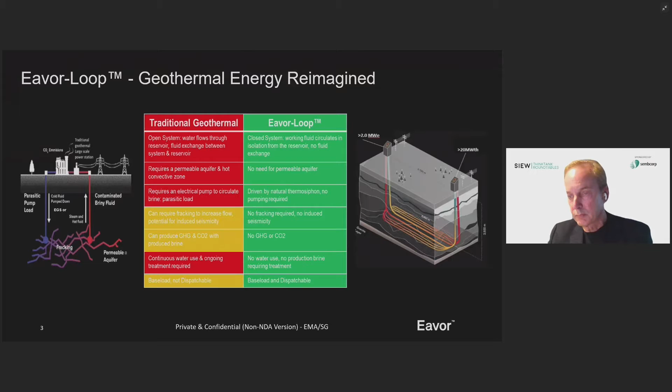And the subject of a much, much longer presentation than the 5 minutes I have today. Next slide, please, page 4.

Thank you. The end result of all this development is the creation of what we feel is a previously unknown energy category that is simultaneously truly scalable, green, and baseload. No other energy source does this. And on top of this, unlike any other green solution, which is intermittent, it can act as baseload. Even better than that, unlike traditional geothermal, it's even dispatchable and can load follow, which can certainly help with grid stability, one of the things you were just mentioning, Sharif.

In fact, with no emissions, no water treatment, no seismicity risk, and a small surface footprint, it's the most benign form of energy imaginable. Being benign and scalable also makes it distributable, another virtuous attribute. Similarly, being distributable, black start capable, and mostly buried underground, it's also an extremely resilient form of energy against man-made or natural disasters.

Finally, unlike wind and solar, it can effectively deliver heat and/or electricity, not just one or the other. It truly is the holy grail of energy sources. Next page, please.

So, the hour. What could energy independence for Singapore look like? On the ground, or from the air here, it could look pretty much like the status quo. It would involve starting with one 80 megawatt site and growing one site at a time up to 10 gigawatts. The sites themselves would be anywhere between 0.5 hectares and 3 net hectares, depending on whether one had aerial cooling or water cooling, and whether or not the surface facilities were buried, partially buried, or made part of another dual-use site.

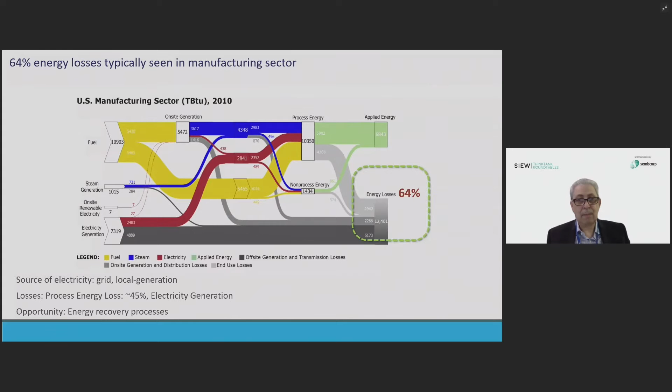And when you put all this together, you see that we lose 64% of our energy. So next slide. So what can be the value proposition? So we have to find a system which enables us to completely manage as a whole all these energies. That means we have to find a way to couple them. So we have developed a system that I'm introducing called Smart Multi-Energy System.

This system will have the mission to be able to dispatch energy, or the mix of energy, to reach an acceptable cost and to reduce the CO2 footprint. That means the system will give orders to the different sources of energy, alternatively, in parallel or sometimes together, to start, to supply the power to reach the minimum imprint of CO2 and obviously of cost.

So the project we have decided with Jurong Port, with JP, we have 3 targets. Energy saving 20%, cost saving 30%, and CO2 footprint less 20% CO2. Next slide.

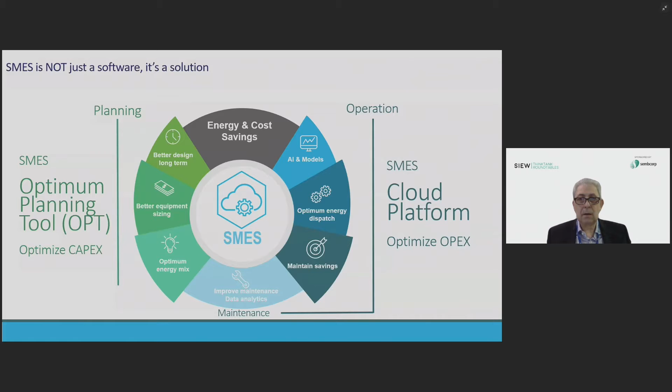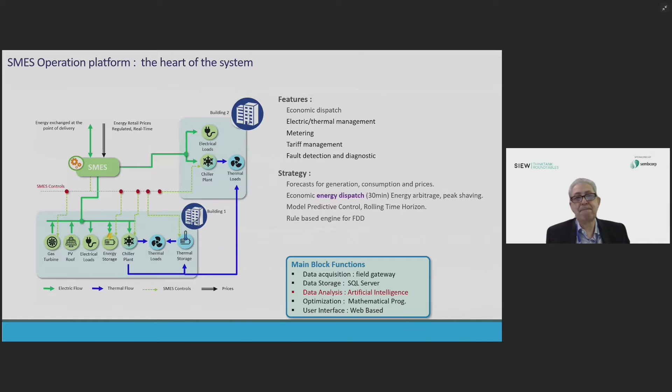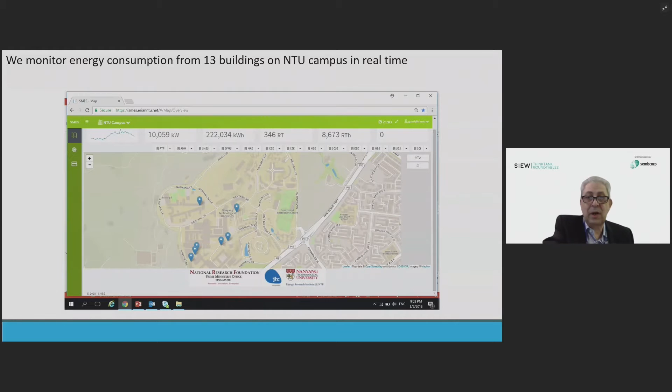What I want to show next is just some pictures. I have time. Next slide. So this is the campus. I cannot show the hardware, so I show the campus. So you see different buildings. You see that we are measuring thermal and electrical power. Next slide. Next slide. Next slide. Yeah. Okay, it's okay here. So we can see one building and the sum of power consumption and whatever on the building. Next slide.

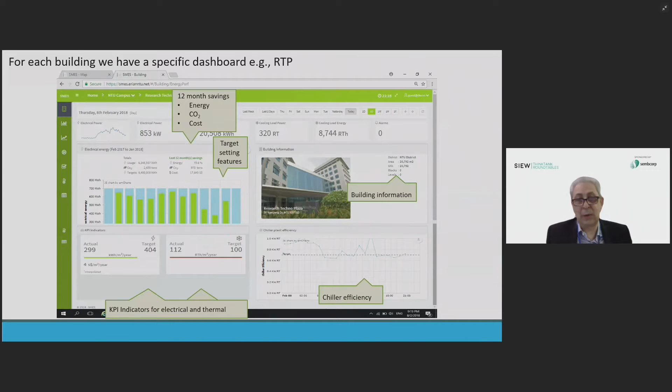Here we see the forecast. We see that every 30 minutes we are capable. So you should have a line, but we don't see it, where you have the past and the future. So we are capable to identify what is the mix between gas engine, battery, solar, what is the mix of energy that we'll be using in the next 24 hours. And we do this computation every 30 minutes.

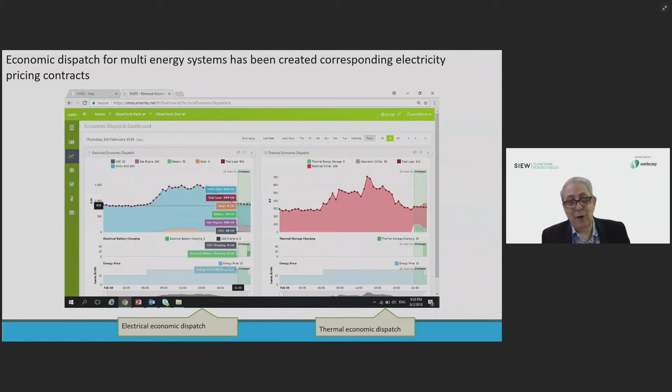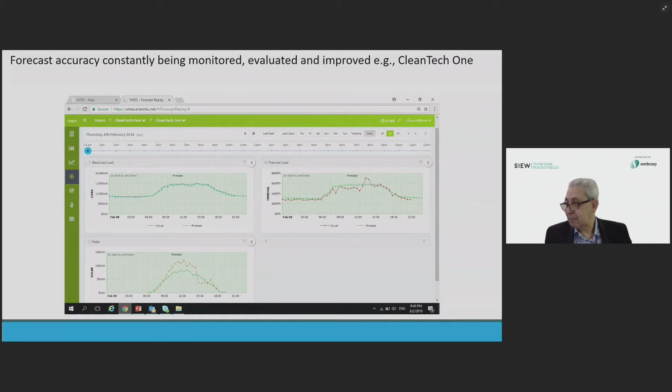I believe my time is up, and it's time to ask Mr. Parik to make his presentation. Very quickly, Mr. Parik is a senior manager in Jurong Port. He's our day-to-day partner in this project. He's at the heart of the design team, and also at the heart of what will become, but he'll explain it better than me, what Jurong Port will become in the future. It will become a living lab for all Singapore to conduct thermal and power experiments. And he'll be covering the topic of the next generation multipurpose harbor, because you will see we are really into the future once we are in Jurong Port.

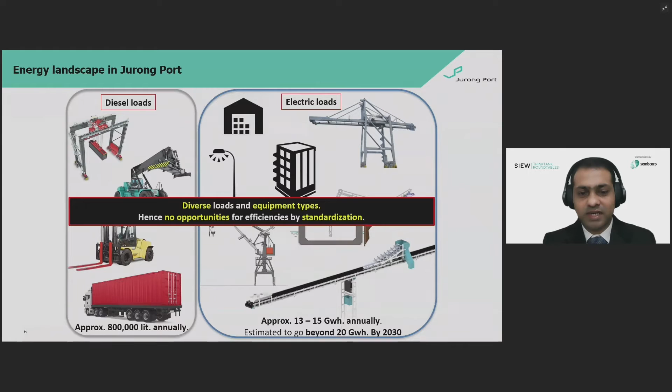And when you look at a big premise, you can see that there is infrastructure, there's lighting load, office load, warehousing, and then all kinds of equipment like conveyors and specialized equipment. Yeah, so I can go on to the next slide. I believe I have to bear with no animation, so unfortunately you won't be able to see all the slides here.

Then when we talk about all this diversity, I will now articulate how we've approached innovation and sustainability at a macro and a micro level. Typically we look at innovation and sustainability in two different terms. But when you put them together, there's a lot of synergy that can be achieved. I'm going to portray only a few examples that show how bringing these two together can have fantastic results. You can click on the next slide.

This particular slide explains how we've approached, at a macro level, using a port-centric ecosystem concept to look deeper into supply chain sustainability, and how at a very strategic level, when we bring industries together, we can achieve huge sustainability benefits in terms of carbon emissions, as well as efficiency, manpower, etc. Now, if the host can just help me play this video, and I hope this works at least.

Jurong Port is Singapore's main gateway for general and bulk cargo. As the premier world-class multi-purpose port in the region, JP serves the needs of the construction industry, offshore marine, petrochemical, and project cargo sectors. Handling more than 90% of Singapore's bulk cement for local consumption and imports, JP has obtained interagency support in 2017 from JTC, BCA, and URA to create a port-centric ecosystem for the construction sector. Equipped with a state-of-the-art conveyor belt system and close proximity to on-site batching plants, the proposed ecosystem will provide national strategic benefits by co-locating the main supply chains for cement, steel rebars, aggregates, and concrete together in an integrated facility.

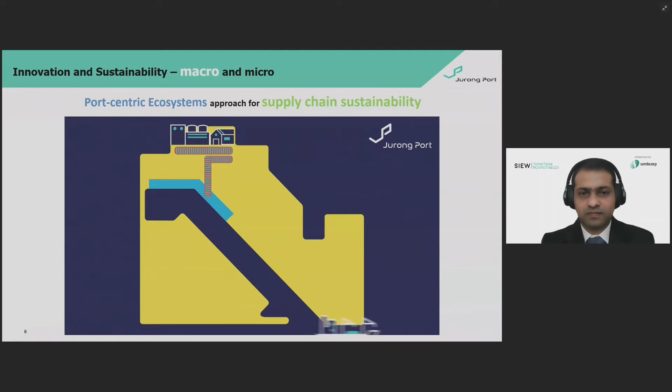Jurong Port's strategic location allows easy access to serve construction sites around Tuas, Jurong, Tengah, and the rest of the western region. Besides proximity to the Second Link, JP is connected to a competitive maritime logistics network with daily services to and from Johor, Batam, and Bintan industrial zones. The deep water berths at Jurong Port can also accommodate mother vessels to call direct at the port. Having the aggregates and batching plants together at JP will reduce national land requirements for the Southwest Cluster from about 29.5 hectares to a compact 11 hectares. More than 600,000 truck trips every year will be taken off the road as a result.

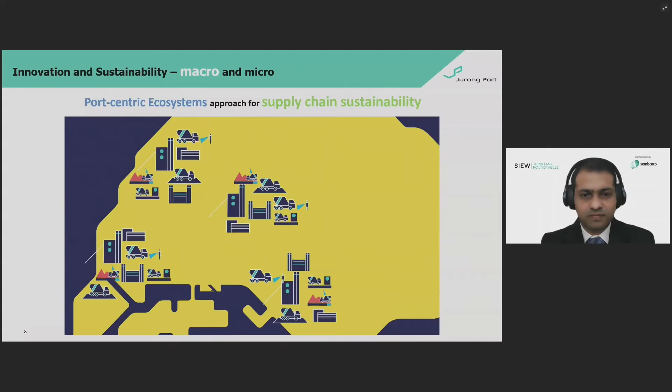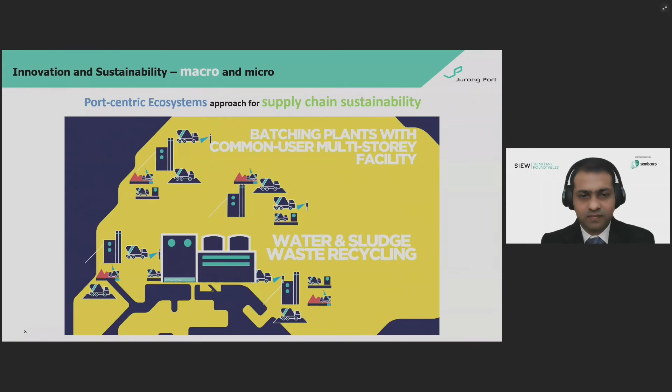Through a one-stop facility, JP will integrate and provide a common user, multi-story facility for shared requirements such as office space, water and sludge waste recycling, weighing, truck washing and maintenance areas, as well as parking spaces. With such a facility, port users can tap on economies of scale to invest in next-generation automation and environmental technologies. By providing efficient and enclosed storage under shelter for aggregates, this will further reduce land usage by about 5 hectares.

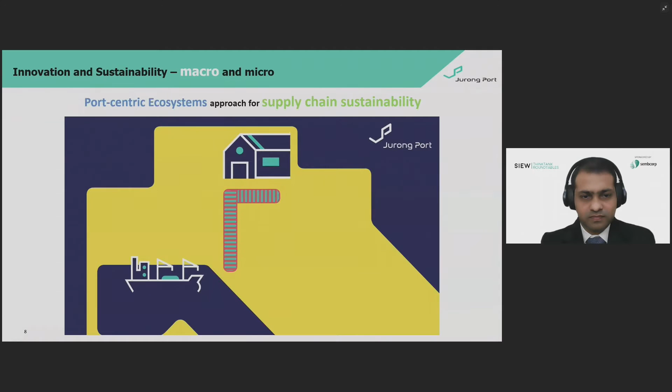JP is the expert in advanced bulk cargo handling methods. Fully enclosed and highly automated conveyors will fetch cargo from the vessels directly to the facility. Dust control systems will minimize any pollution.

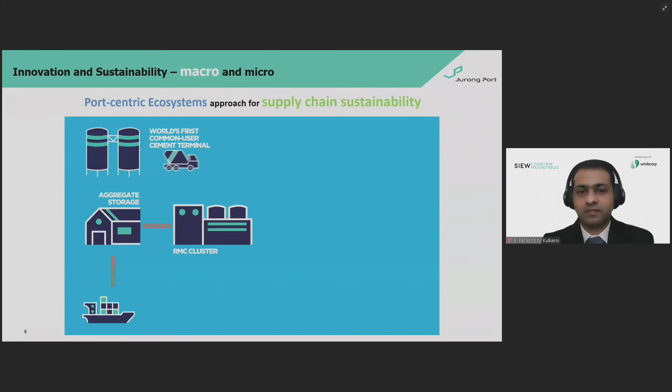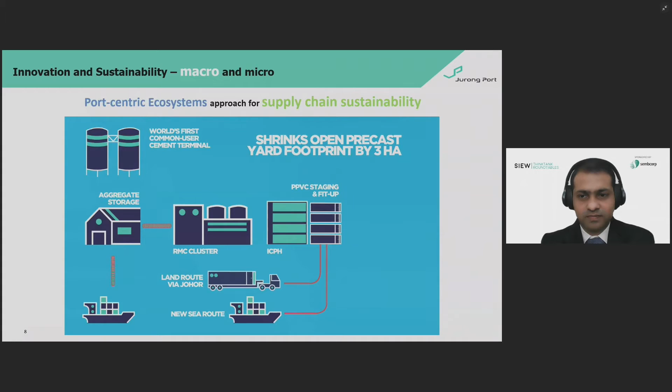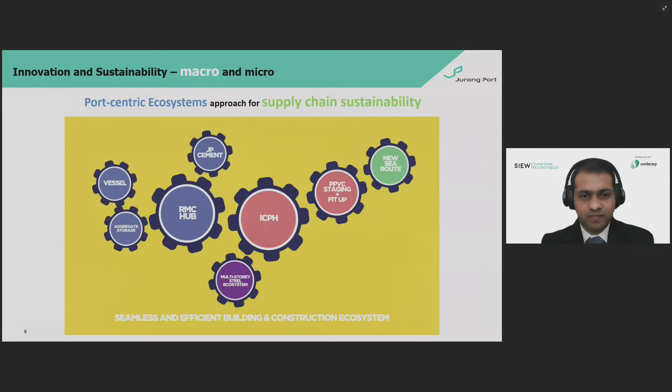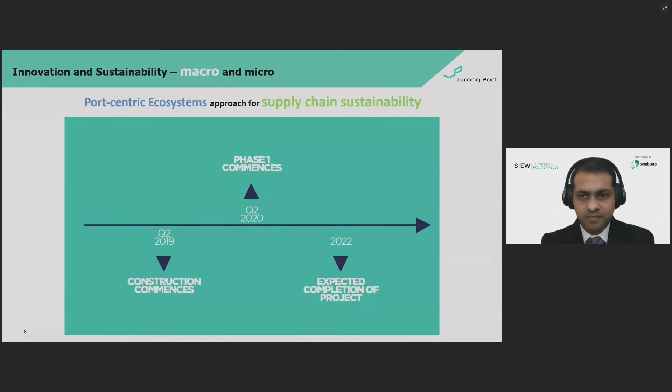With cement, aggregates, batching plants, and all other necessary requirements connected to each other, Jurong Port's ready-mix concrete ecosystem will pave the way to transform Singapore's building and construction sector by leveraging advanced technologies. In future, the facility can scale up and reap even greater synergies with prefab and steel clusters. The RMC ecosystem, creating value for Singapore's construction industry.

Yep. Thank you, guys. Hope you can hear me again.

In this particular video, you would have noticed how bringing different industries nearer to the port has strategically helped reduce so many truck trips. In fact, just for this case of RMC itself, it's about 600,000. But as we develop more ecosystems like the steel that was mentioned and PPVC and prefab hub, we can easily cross more than 1 million truck trips on road. And that really translates to a lot of carbon emission savings. Now, this is a very strategic approach on a macro level.

Another example, if you can click the next slide, is this study and the venture that we have now gone into together with Chiyoda and six other corporations, which is looking into hydrogen as a next generation fuel. And again, Jurong Port being, like what Sheriff had mentioned, a living lab, we are now joining hands with the industry to test bed and also to look at how hydrogen can be landed in Singapore. And with this, we can make the grid itself cleaner. And I believe our friends from Sembcorp here are also a party there.

And that's exactly what we talk about when we try to introduce ecosystems here that can help achieve greater benefits in terms of national carbon emission savings. And I think this is a testament to Singapore's commitment towards green and carbon neutral, because as you know, we have been developing a lot of solar in Singapore, but we all know that's not enough. And hydrogen is one of the next generation fuels that can help us get clean energy. Thank you. Next slide.

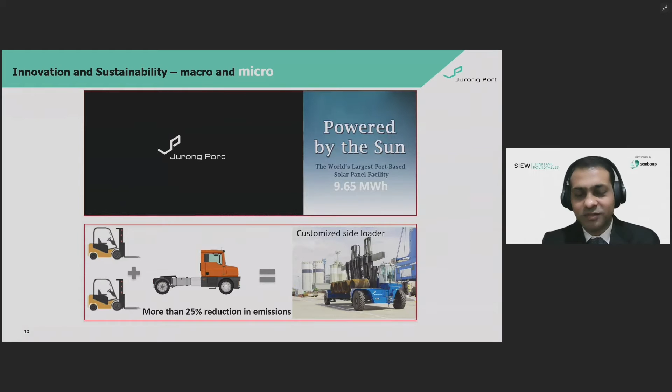This is where I'm going to talk about how SMES has played a key role in making Jurong Port a next generation port, because first of all, as we operate this 155 hectare facility, we need to understand the DNA of energy inside the port, and this is where SMES comes really handy.

Next slide, please. Next, click. Yeah, I'm glad that it works here.

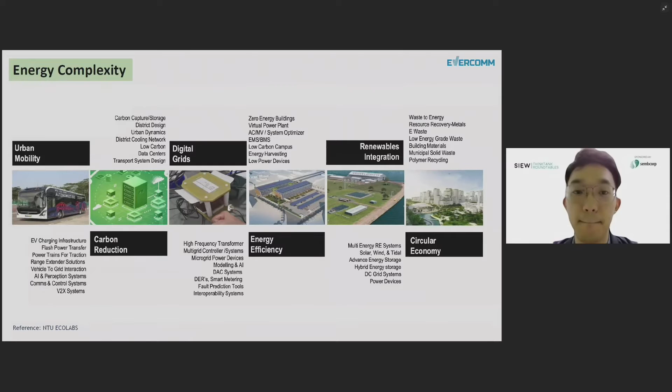And one of the projects that we have done is actually with ERI@N as well as a public listed company from Taiwan. They're one of the largest power electronics power supply manufacturers. And as a company, as we are entering into this space, we realize that physical hardware, at the end of the day, is the enabler piece for a lot of these software abilities, right? Without these enabling hardwares, a lot of the things that we want to do at the software level will not be able to translate into real savings or real output.

But if we as a company want to directly work with a lot of these bigger conglomerates, it will be almost impossible, right? And this is where you can leverage on an open system innovation approach by partnering up with universities like NTU and ERI@N, and to work with conglomerates who are very strong in power electronics and power supply products, where a startup can come in to really focus on the software aspect and the innovation model, business model. I think this kind of collaboration can really shorten the product to market phase.

So in this particular collaboration, we're developing bidirectional inverters that can help us better do a lot of the market trading activities when the market begins to open up. In terms of the scope of the collaboration, of course, the main IP comes from the universities, while the startups are much stronger in developing platforms, software, and algorithms. And the big manufacturing companies are really good at cost down and making sure that the hardware prototype can really be scaled and be ready for design for manufacturing, right?

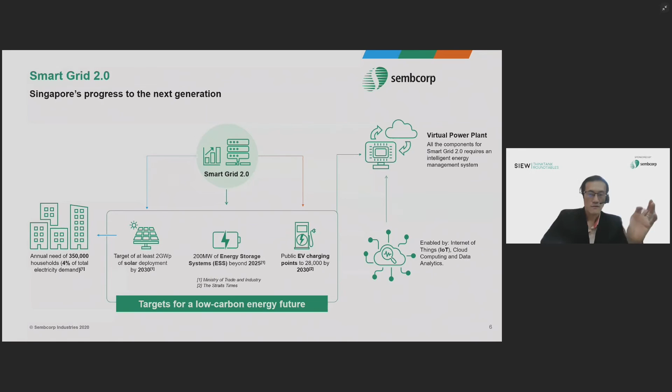So to help to realize the success of the Smart Grid 2.0, EMA, Sembcorp, and ERI@N came together last year to develop a virtual power plant. Next slide, please. In a nutshell, the virtual power plant that we envisage is actually, the key point that Sharif just now briefly introduced, the aggregation. What are we trying to aggregate? We aggregate the idling assets that are not able to participate in the market efficiently or cost effectively.

If we are able to build a digital platform to accumulate or aggregate all these small idling assets and participate in the market, that will save a lot of potential investment and land area, as well as improve the quality of the electrons that the consumer will be able to enjoy. I have a video to describe fully the virtual power plant that we are doing currently together with the partner. So, the video.

A virtual power plant aggregates and manages distributed energy resources, known as DERs, such as solar PV generators, energy storage, and gas generators, as well as building loads. Up to thousands of these assets can be scattered across residential, commercial, and industrial locations. This portfolio of energy assets, combined into a single entity, operates like a conventional power plant. It brings about new opportunities to the DERs by allowing them to participate in the energy market, including grid ancillary services, such as frequency regulation and reserve, to enhance grid stability.

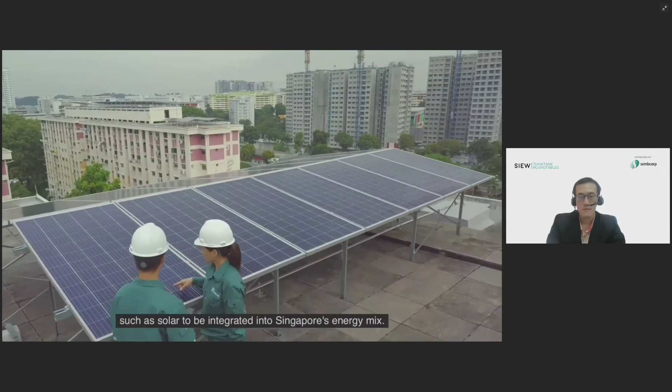Energy Market Authority of Singapore and Sembcorp Industries Limited, in collaboration with Energy Research Institute at Nanyang Technological University, have embarked to build Singapore's first virtual power plant. This project aims to contribute towards Singapore's efforts to meet its climate change commitments by allowing for more clean and distributed energy resources, such as solar, to be integrated into Singapore's energy mix. Our research leverages recent developments in information technology, such as large data transfer in real time, advanced forecast with smart algorithms, as well as innovative strategies for optimum dispatch.

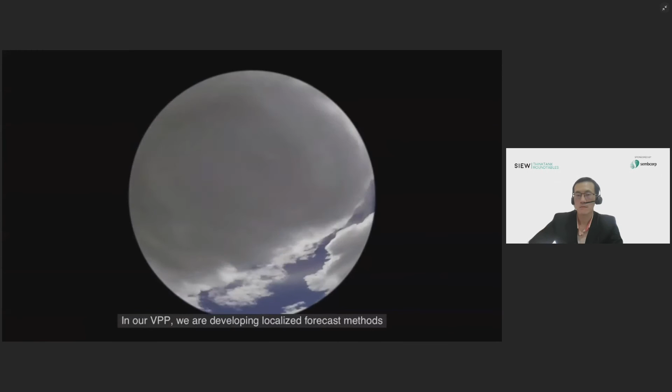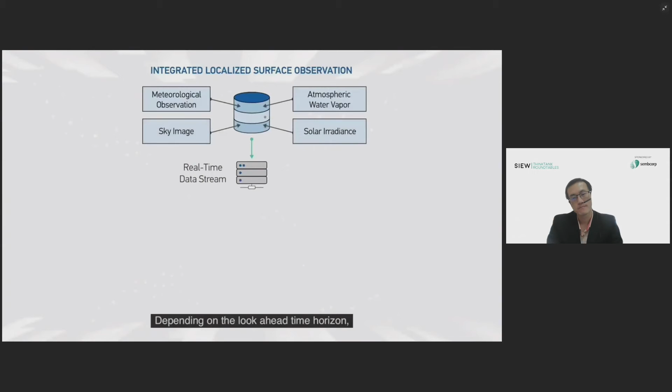Using data science and machine learning algorithms, we target to produce more accurate predictions for solar power generation, building load demand, and electricity price forecast. In our VPP, we are developing localized forecast methods using sky cameras and various weather sensors to achieve higher accuracy results. Depending on the look-ahead time horizon, these parameters can improve on existing forecasting algorithms to give a better prediction on the solar irradiance profile.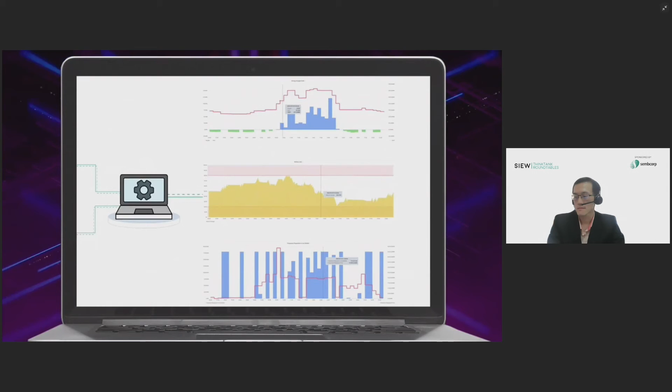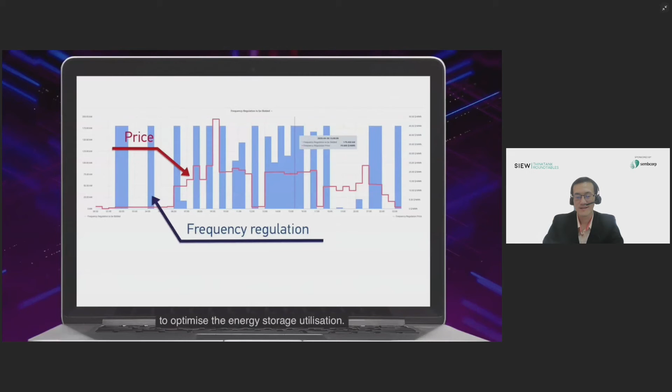Our optimization algorithm takes in the various forecast profiles and computes the optimum power dispatch for each of the energy assets for a future time horizon. This enables the energy assets to operate optimally for maximum return. Let's take a look at the projected dispatch profile of the energy storage system. We can observe that energy is purchased to charge the energy storage at low prices and sold at high prices in the energy market. Furthermore, access to the grid ancillary services market offers opportunities to generate additional returns. Our algorithm considers the potential value streams of different grid services to optimize the energy storage utilization.

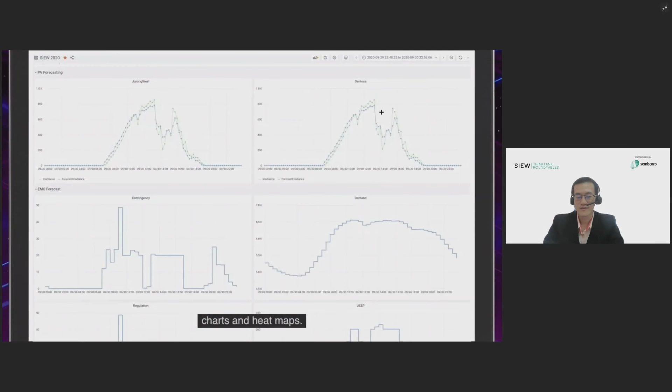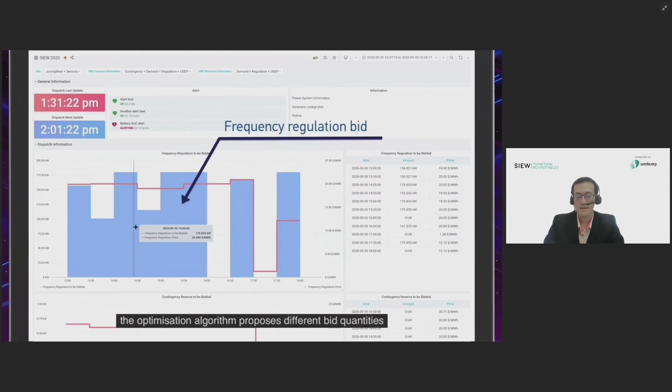Our user-friendly trading advisory dashboard offers comprehensive information in the form of tables, charts, and heat maps. Here are the charts showing the grid services to be offered by the VPP for the next 24 hours. For the frequency regulation service, the optimization algorithm proposes different bid quantities based on the price profiles and the state of charge of the energy storage.

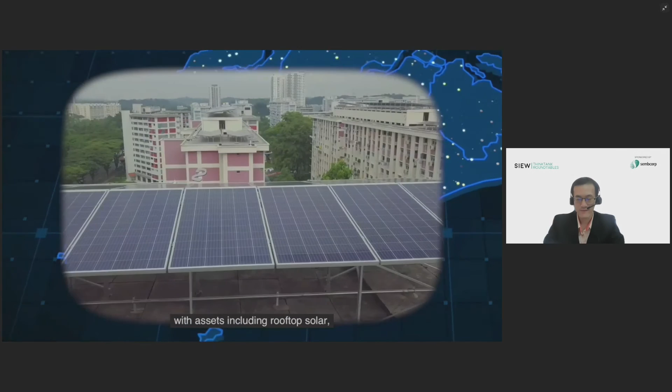On completion, the virtual power plant will include 4 locations spread across Singapore: 2 residential sites, 1 recreational facility, and 1 industrial site, with assets including rooftop solar, floating solar, as well as large-scale energy storage systems. This project will serve as a blueprint to bring this technology to future large-scale commercialization. We hope the knowledge gathered and shared through our research and implementation will help to diversify and improve Singapore's energy market. Join us to create a more mature and resilient energy market.

Thank you. So apologize for being lazy to present on the spot by using the video, but I thought using the video will capture the full story. Having said that, next slide.

Besides some of the applications that we mentioned just now, there are also many other applications that we can build on top of the virtual power plant, especially when it comes to the ancillary services, but also some other so-called merchant applications that we foresee to be gaining more and more traction. May not be in Singapore yet, but already seen it overseas.

So of course, in this 2 years program that we have with ERIAN, we are not going to build everything. That's where we are also urging potential collaborators to jump into this wagon to work together with us to realize the smart grid 2.0 of Singapore as early as possible too.

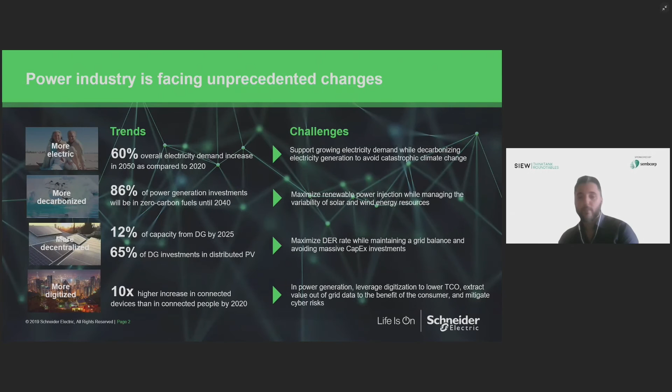And speaking about flexibility, this is leading us to the third D, which is about digitization. You cannot have flexibility without measurement, and you cannot have flexibility without communication. There is a big rise of smart metering, for instance, and utilities which used to manage the dispatch of electricity and electricity only are now managing trillions of data. And this has an impact on cybersecurity, since if you want to put down a country, you will start targeting all the critical infrastructure, and of course the electric network is one of them. If you can move to the next slide, please.

So there are 6 major trends which prevail. Number one, if we go one by one, is about changing regulation and policy. The distribution utilities worldwide are strongly regulated, whatever the market model. And utility regulation was invented in the late 19th century, and it was not really meant for a decentralized power system with renewables. So regulatory evolution is on the horizon, and it generates uncertainties about the impact it will have on the investment strategy, on the revenue model, and on the associated risk management.

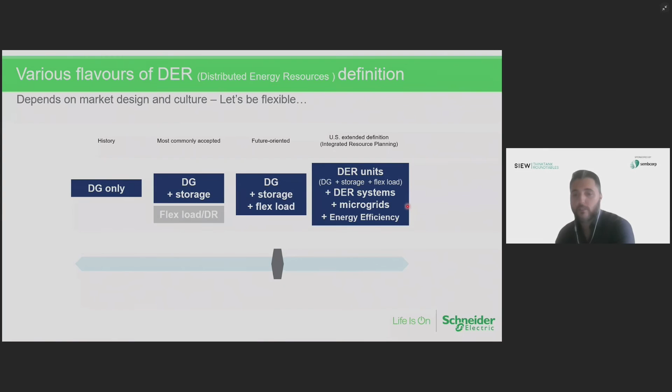UK also has an aggressive policy for DER. They position themselves just after the top 3, and we qualify them as medium penetration. And I would say most of the countries do not feel the heat to the same extent yet, still with a rather low penetration rate, like France. They have more time to prepare for the new model.

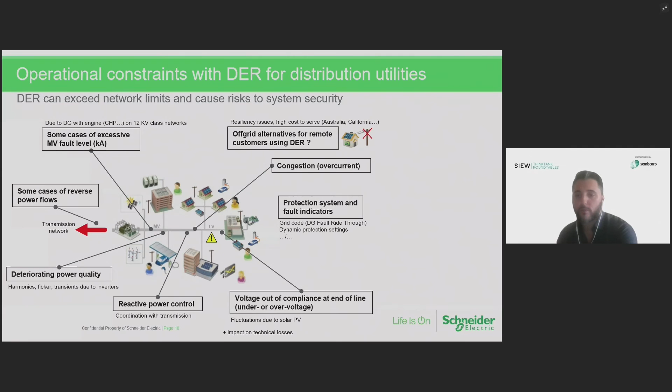Next page. Thank you. So the software that can help manage those operational constraints, we call it DERMS. It stands for Distributed Energy Resource Management System. So the DERMS will basically model the DER, monitor and forecast, as well as optimize them in order to maintain the stability on the network.

And this is, I believe, what Anne is going to present you in the next presentation. So with that, thank you very much.

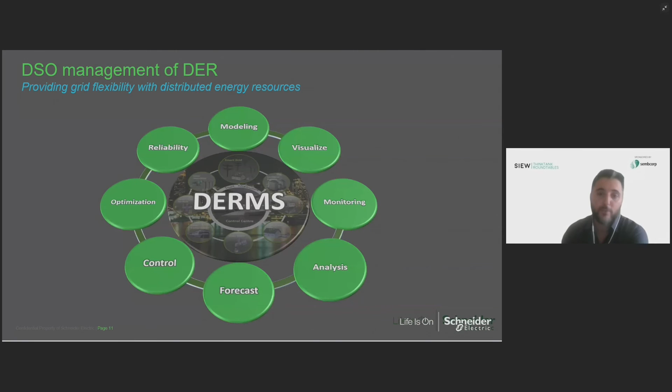Thank you very much, Jean-Philippe. Now it's time to go to Anne's presentation. I want to make the link: we had a presentation about VPP, about aggregation. Now DERMS will speak more about the stability and the dispatch of the power. Anne Swazik is the brain, I would say, of our DERMS project in NTU. She's architecting with Singapore Power what should become the future grid of the nation. Anne, please go on. Thank you, Sherif.

Thank you for having me today. So this presentation will introduce Grid 2.0 energy management system from the perspective of the distribution grid as an enabler of the energy transition. So next slide, please.

So looking at global trends, we see, and it has been already presented, that for sure the future will be green, with potentially, looking at the long-term outlook, half of the electricity mix coming from renewables, wind and solar, by 2050. The second important trend is electrification as a way to decarbonization, specifically in the transport industry, with EV uptake having a potentially important impact on the shape of the consumption.

And Singapore has strong commitment as well in regard to those two trends, with a target to reach 1.5 gigawatts of solar by 2025 and a vision for phasing out internal combustion engines by 2040. In this context, quite often we refer to the grid as a legacy system. But in fact, what we will see is that the grid is transforming in the background in order to keep ahead of this energy transition and to be an enabler. Next slide, please.

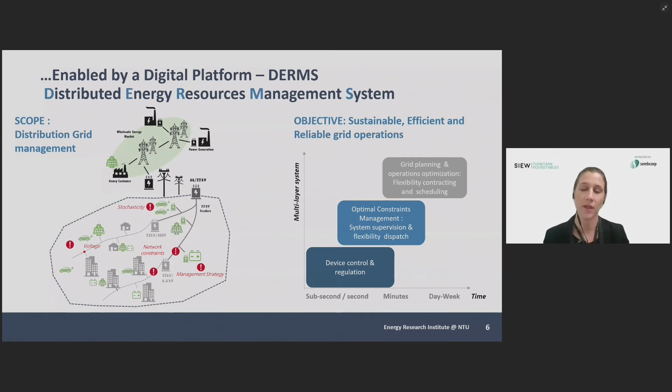And among those revenue opportunities, we have providing services for the distribution grid. This is where the DERMS platform comes into the picture. The DERMS platform will model and take into account all the grid assets, the topology, the constraints, the specific location of all those different consumption, DER, and flexibility, and run some optimization and analysis of this network to identify the constraints and decide which asset or group of assets should be dispatched in order to manage the constraints.

And this is where the DERMS will send dispatch commands or requirements for assets to the VPP platform. So effectively, both VPP and DERMS are partners with this objective to have a sustainable and flexible grid and energy system. Next slide.